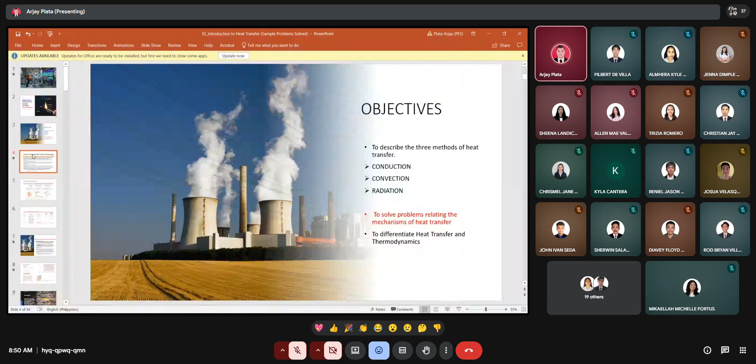Okay. I think most of you or all of you are already familiar with how we solve problems here in heat transfer. So in the analysis of heat transfer problems methodology, we will apply the seven solving steps. In working with heat transfer problems, you will gain a deeper appreciation of the fundamentals of the subject, and you will gain confidence in your ability to apply these fundamentals to the solution of engineering problems.

In solving problems, yung paggamit natin ng systematic procedure characterized by prescribed format will be implemented. So hindi lang siya applicable sa heat transfer na course, pero sa outside when you graduate and need mag-solve ng mga cases, mas ina-advise na you have to solve it systematically. So lahat, anything na need ng analysis, dapat systematically natin siyang isasolve.

So hindi lang siya about sa course natin, pero in real life, applicable din yung systematic way of solving. Mas madali tayong maintindihan. It's easy for us to communicate what we are proposing or what we are solving if we make it systematic.

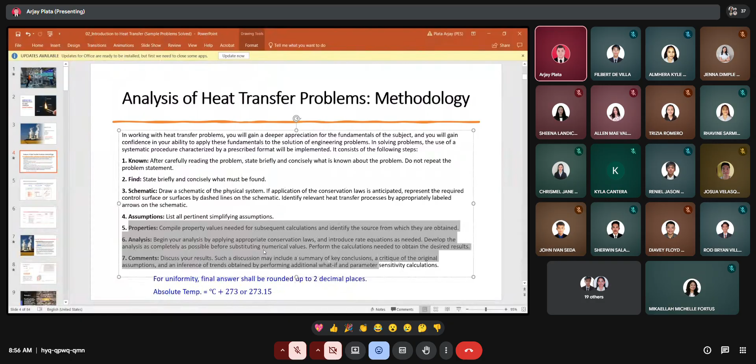As an engineer, it is important that we understand the physical mechanisms which underlie the heat transfer modes, and that we be able to use the rate equations that quantify the amount of energy being transferred per unit time.

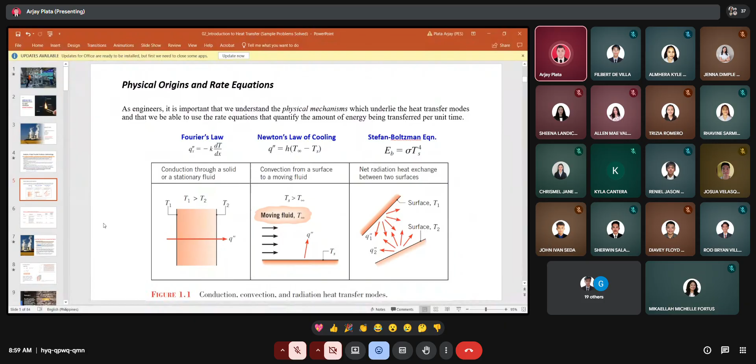So this is the summary of the heat transfer processes. So we have conduction, convection, and radiation. For conduction, we have diffusion of energy due to random molecular motion. Again, this is the equation, Fourier's law, negative k dT over dx. And then transport property is thermal conductivity, which is k. For convection, we have diffusion of energy due to random molecular motion plus energy transfer due to bulk motion or advection.

So we have q double prime equals h (Ts minus T infinity). So h is in watt per meter squared Kelvin. Yun yung ating transport property, yung convection heat transfer coefficient, h. Ang isa pang term dito is film coefficient. Sa mga heat exchangers, ang ginagamit natin term ay film coefficient.

So for radiation, we have energy transfer by electromagnetic waves. Ang difference nila is wala tayong medium. So nata-transfer yung heat through electromagnetic waves. Our transport property here is emissivity and radiation heat transfer coefficient, hr. So we have two formulas. The first one is the Stefan-Boltzmann equation: emissivity times Stefan-Boltzmann constant times (Ts to the fourth minus Tsur to the fourth). Here, dapat naka-raise sa fourth power yung inyong temperature.

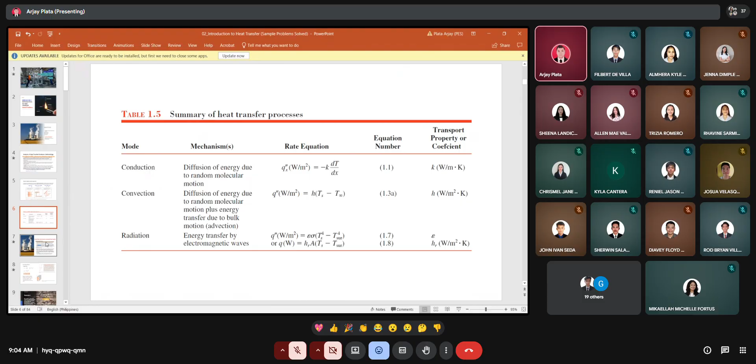So steady state heat transfer can be a conduction, convection, or radiation process. So irrespective of the mode of heat transfer, in steady state heat transfer, the heat flow rate remains constant at any point in time.

So steady state heat transfer can be described in terms of the temperature as the variable, and the temperature of the system remains constant over time in steady state heat transfer after thermal equilibrium is attained. So, familiar na kayo sa steady state. Pero sa transient, ito yung bago. In reality kasi, transient heat transfer yung nag-occur. So, first, transient heat transfer muna siya, and then eventually saka siya magiging steady state.

So, when we say steady state, yung heat transfer nyo na pumasok sa system ay equal dun sa heat transfer na lumabas dun sa system, whether conduction, convection, or radiation yung process. When you say transient, hindi siya equal. So, unsteady siya, yung transient. In the physical world, heat transfer starts at a transient and then reaches a steady state until thermal equilibrium is reached. So, una, transient and then saka siya magiging steady afterwards, until ma-reach natin yung thermal equilibrium.

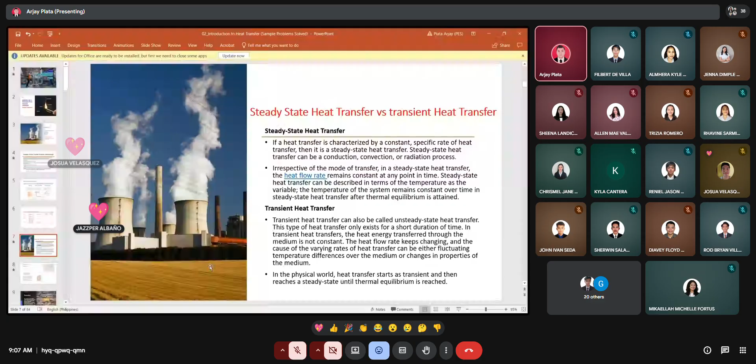So, conduction. Unahin natin yung conduction. We have the Fourier's law: q''x equals negative k dT over dx, so negative k delta T over L. Note that this equation provides a heat flux, that is the rate of heat transfer per unit area. Heat flux siya, pero kung ang hinahanap is heat rate, you just have to multiply it by the area. As you can see on our figure, this is the association of conduction heat transfer with diffusion of energy due to molecular activity.

So ano nangyayari kapag meron tayong, for example, heated surface? Meron tayong random molecular motion. From high energetic molecule, matatransfer yung energy to less energetic molecule, and eventually lahat ng yan ay magiging high energetic molecules na. So, nagkakaroon ng temperature increase. That is why there is a heat transfer. Natatransfer ang heat from high temperature papuntang low temperature. So, there's a temperature difference. Okay, so that's for conduction.

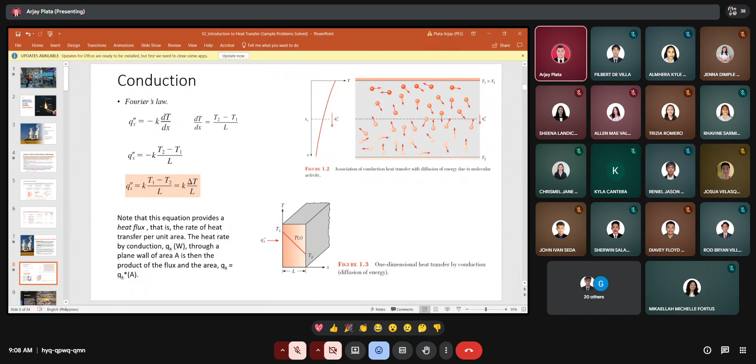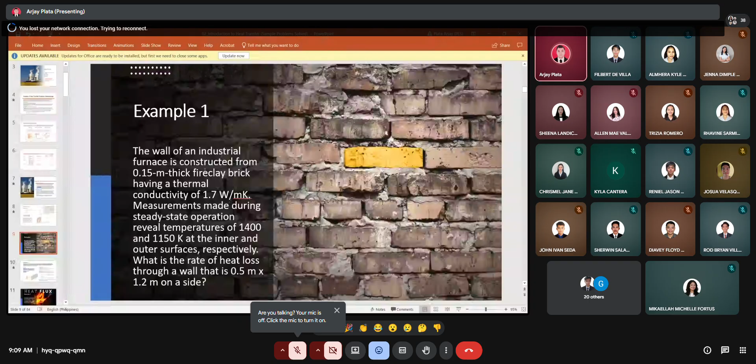Let us have some sample problem. The wall of an industrial furnace is constructed from 0.15 meter fireclay brick having a thermal conductivity of 1.7 watt per meter Kelvin. Measurements made during steady state operation reveal temperatures of 1,400 and 1,150 Kelvin at the inner and outer surfaces respectively. What is the rate of heat loss through the wall that is 0.5 meter by 1.2 meter on a side? So very basic. Pero yung ating mga sinusolve is mas complex pa dito.

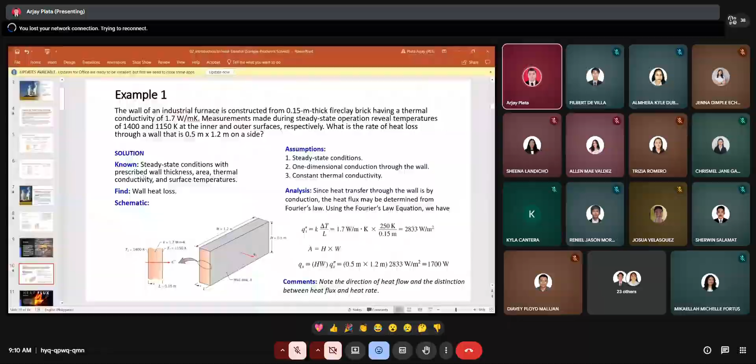So just a recap, sa pag-solve nito, we have to use the systematic way of solving problems. We have the known, which is steady state conditions, wall thickness, thermal conductivity, and surface temperatures. Ang find is the heat loss. And then schematic. Sa schematic makikita nyo dyan yung ating temperature na given, yung thermal conductivity, tsaka yung length ng ating object. Assumptions: steady state conditions, one-dimensional conduction through the wall, constant thermal conductivity.

Analysis: since heat transfer through the wall is conduction, the heat flux may be determined from Fourier's law. Direct substitution lang tayo sa Fourier's law. We have q''x equals k delta T over L. K is 1.7, given sa problem. Walang area kasi heat flux. Delta T is 250 Kelvin, that is 1,400 minus 1,150, and length is 0.15 meters. So you will get 2,833 watt per square meter na heat flux. If ang hinahanap ay heat rate, multiply nyo lang yung 2,833 ng area, which is H times W, 0.5 meter by 1.2 meter. That is equivalent to 1,700 watts.

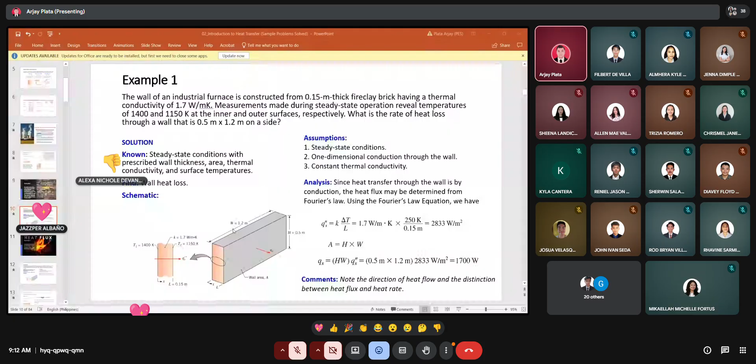Okay, so let's begin with another example. So the heat flux that is applied to the left face of the plane wall is 20 watt per square meter. The wall of thickness L is 10 mm and thermal conductivity K is 12 watt per meter Kelvin. So if the surface temperatures of the wall are measured to be 50 degrees Celsius on the left side and 30 degrees Celsius on the right side, do steady state conditions exist?

So I'll give you 5 minutes to analyze this problem. Okay? Balikan ko kayo after 5 minutes.

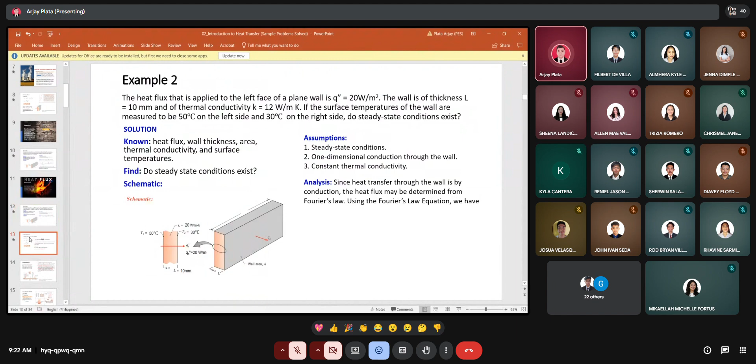So, going back. So, Q equals K delta T over L. So, the value of Q is 24,000. Given yung K na 12 watt per meter Kelvin, given siya sa problem. Another given is the temperature, which is 50 and 30. So, there is a change in temperature. So, delta T niya is 20 degrees Celsius. And another given is the length, from the problem.

So, if you solve for the rate of heat transfer per unit area, or heat flux, that would be 24,000. So, steady state ba siya? Definitely not, because the heat flux should be 20 watt per meter squared. So, therefore, it is not steady state since the heat flux given on one side is 20, while on the other side is 24,000. So, to verify a steady state condition, we have to check what the temperature difference would really be. So, delta T is Q double prime L over K.

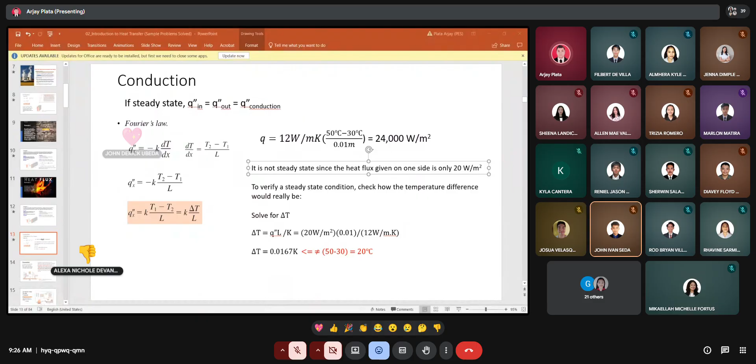Okay, so we have to solve for the delta T, and ang delta T value natin ay 0.0167 Kelvin, much less than 20. Okay, any question with this problem? None so far po. Okay, so let's proceed with convection.

So review lang yun ng conduction. So ngayon, review ulit ng convection. Just a recap. So as we all know, convection heat transfer is comprised of two mechanisms. We have the energy due to random molecular motion or diffusion, and also the energy transferred by bulk or macroscopic motion of the fluid. Yung energy transfer due to molecular motion or diffusion is what we call the natural convection.

While yung energy transfer by bulk or macroscopic motion of the fluid, nangyayari yan if meron tayong mechanisms like fans, blowers, or pumps na nag-trigger para magkaroon ng convection, which is nagkakaroon dyan ng bulk or macroscopic motion. Ang tawag natin dito ay advection.

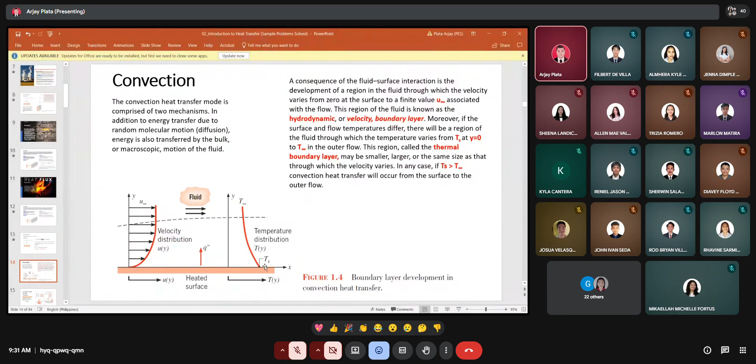So for convection heat transfer processes, regardless of the nature of convection, the appropriate rate equation is q equals hA(Ts minus T infinity). Newton's law of cooling, Ts is the surface temperature and T infinity is the fluid temperature. What are the natures of the convection process?

It can be through forced convection, so we have forced flow. It can also be through natural convection or molecular diffusion. We also have boiling. It is similar to natural convection because random molecular motion occurs so the water becomes vapor. This happens in reboilers.

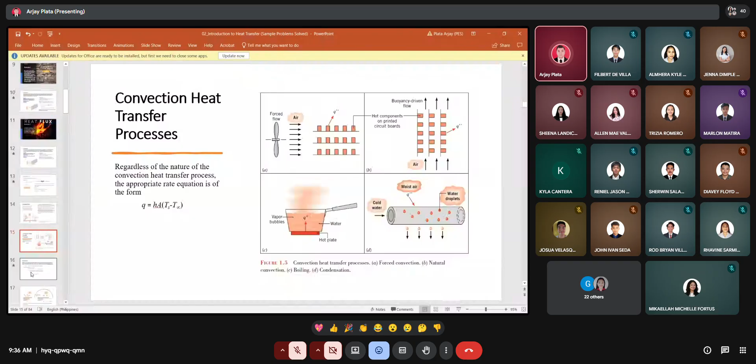Review din ang radiation. So radiation is emitted by the surface, originates from the thermal energy of matter bounded by the surface. And the rate at which energy is released per unit area is termed the surface emissive power E. There's an upper limit to emissive power which is prescribed by the Stefan-Boltzmann law. So we have this equation E sub b equals sigma Ts to the fourth. Such a surface is called an ideal radiator or black body.

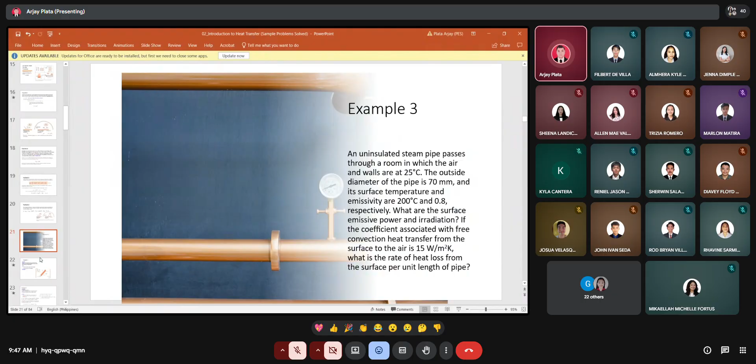Okay, so let's proceed with the analysis of the problem. So again, nilagay ko na dito sa ating slide para hindi na natin isa-isahin, nakatipid tayo sa time. So solution, known is the uninsulated pipe of prescribed diameter, emissivity, and surface temperature in a room with fixed wall and air temperatures. So the required is the emissive power and irradiation. Yun yung unang hinahanap.

When we say emissive power, yun yung value ng E. Na-discuss natin yung formula ng E kanina. So, emissivity sigma Ts to the fourth. Yun yung formula ng E. So, G is irradiation. Nasaan na yung G natin? Alpha G. So, G equals sigma Tsur to the fourth.

So, yung emissive power, ang formula niya ay temperature ng surface raised to the fourth power. Pero yung G, ang formula niya ay temperature ng surroundings to the fourth power. So, yun yung pinagkaiba. Lagay natin yung formula ng G dito.

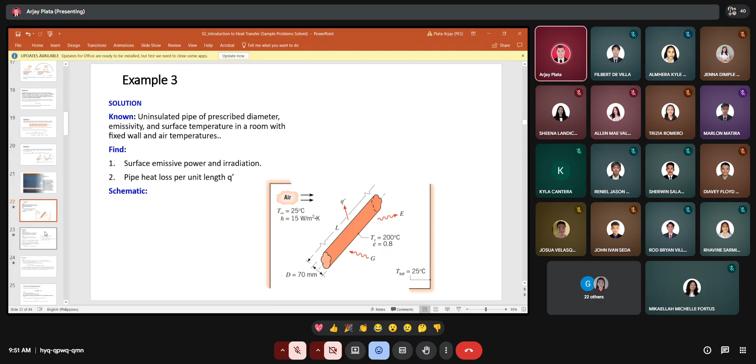By the way, ang assumptions natin dito ay steady state condition. Radiation exchange between the pipe and the room is between a small surface and a much larger enclosure. Parang ganito siya. Ito yung system natin. So, ang radiation ay nag-occur from surface to large enclosure. Kaya, yan yung ating assumption.

And surface emissivity and absorptivity are equal. Ibig sabihin, siya ay gray body, pag equal ang emissivity at absorptivity. Okay, so let's solve. So emissive power is equal to emissivity times Stefan-Boltzmann constant times Ts to the fourth.